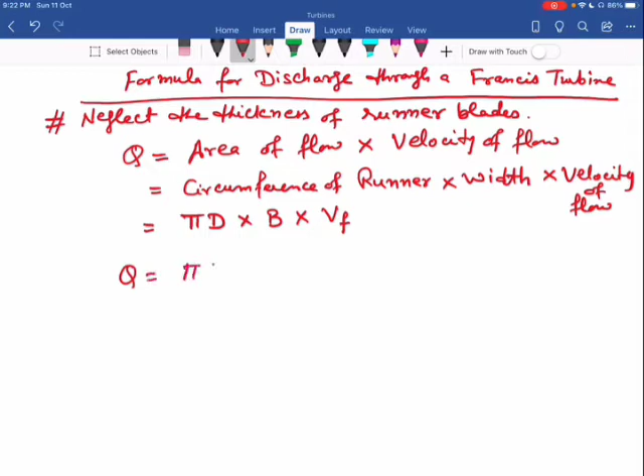Now the circumference I can write as pi d. Width of the runner I can write as b, and the velocity of flow I can write as vf. So discharge formula I can write as pi db into vf, where d is the diameter of the runner, b is width of the runner, and vf is the velocity of flow, or flow component of velocity. So that gives you the formula for discharge.

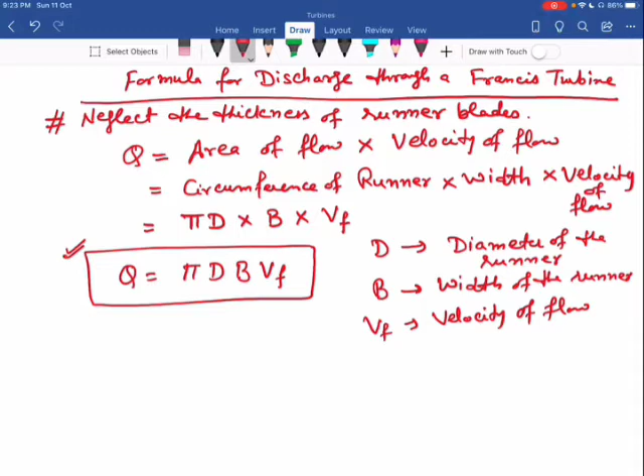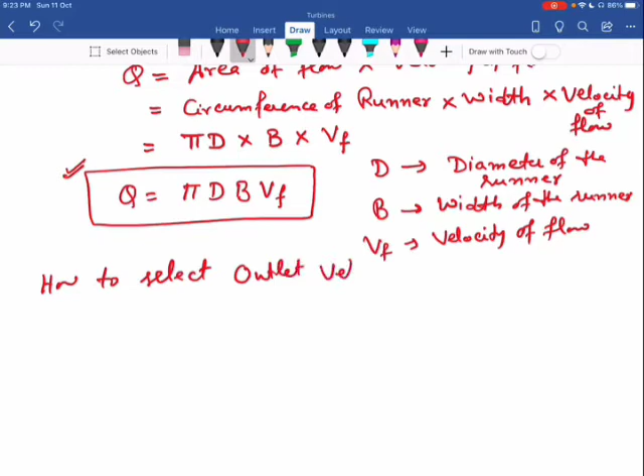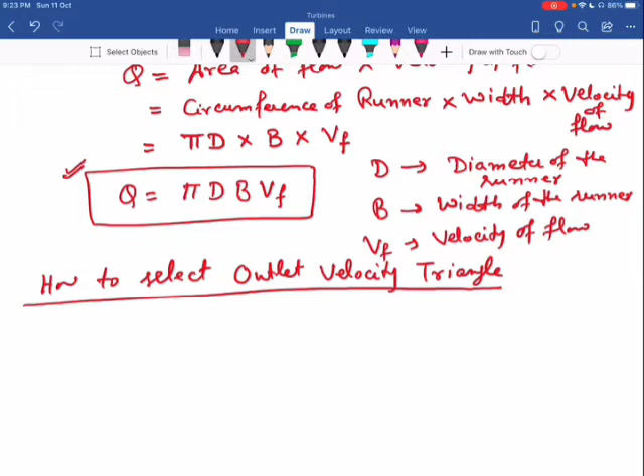Now next is how we select the velocity triangle. So for this we see outlet velocity triangle first. So next I see how to select outlet velocity triangle. As we have seen earlier, we have three different shapes for outlet velocity triangles depending upon angle alpha O.

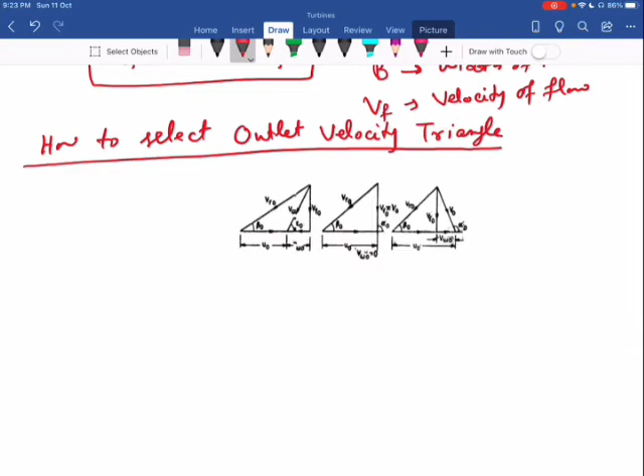So if I see this diagram, you can see three different shapes of velocity triangle. Here in the first, angle alpha O is less than 90 degree. Here alpha O is equal to 90 degree, and in the third, alpha O is greater than 90 degree. So at outlet we have three different shapes of velocity triangle.

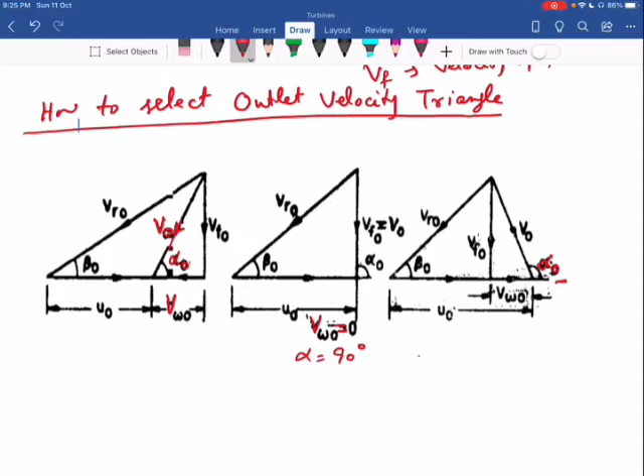Now this velocity is VO, and this component is VWO. Here the component VWO is equal to 0. Now the kinetic energy of outgoing water is given by VO square divided by 2. This is the kinetic energy per unit mass of water that is leaving the turbine.

So this is with respect to absolute velocity at the outlet, that is VO. So I can write the kinetic energy of leaving water as VO square divided by 2, and this is the kinetic energy per unit mass. As we know, this leaving energy is just wastage of energy going out from the turbine, so our purpose is to minimize this waste energy or leaving energy. So we have to minimize it.

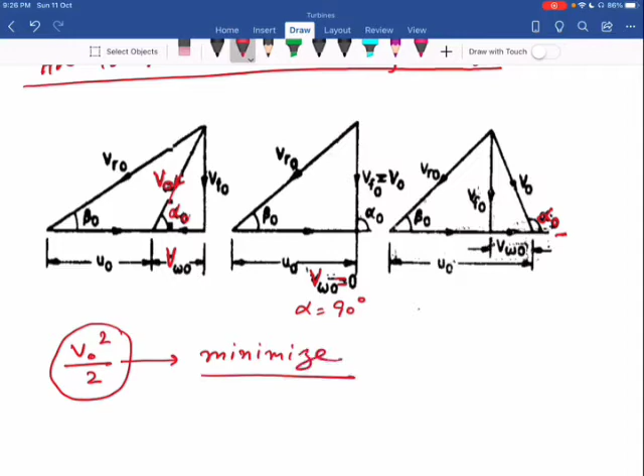So to minimize this energy, you can see from this formula that we have to reduce the value of VO. Now out of these three triangles - this is the first, this is the second, and this is the third velocity triangle at the outlet. Now you can see out of these three, for which triangle VO is minimum.

So now you can see in the second triangle, when angle alpha O is equal to 90 degree, VO is minimum as compared to VO in triangle 1 and VO in triangle 3. So you can say it is desired to keep this value to minimum. So from the outlet velocity triangle, it can be observed that the velocity VO will be minimum when angle alpha O is equal to 90 degree.

So in that case, VO coincides with VFO. You can see here VO coincides with VFO. Now further in this velocity triangle, you can see VWO, the whirl component of velocity, is 0. So thus in practice, all the reaction turbines are usually designed for this radial flow, meaning the angle alpha O is equal to 90 degree. So for the outlet, we have this velocity triangle.

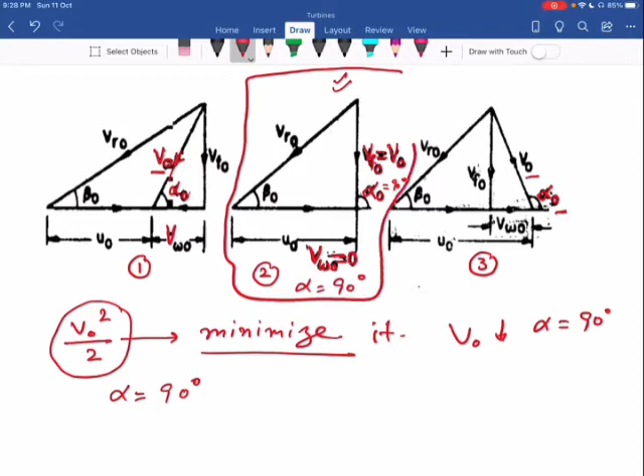So to minimize the value of VO, I have to select the second velocity triangle when angle alpha O is equal to 90 degree. Now further in the second triangle, we can further reduce the value of VO if we reduce the value of beta O. So this angle is also kept small, that is in the range of 15 degrees.

So keeping these two considerations in mind - the first condition alpha O equal to 90 degree, and then beta O minimum, approximately equal to 15 degrees - we have the second velocity triangle at the outlet of the Francis turbine. Now further in this, VWO is equal to 0. So this we also call as the radial discharge of a turbine.

Okay, so that means for radial discharge, we can keep alpha angle equal to 90 degrees, or you can say VWO equal to 0.

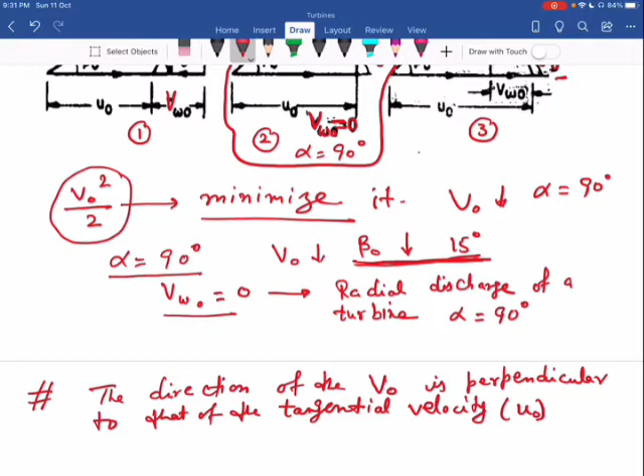Now this also implies that the direction of the absolute velocity of water at the outlet, that is VO, is perpendicular to the tangential velocity, that is u. So tangential velocity at outlet I can write as uo. VO is perpendicular to u or uo.

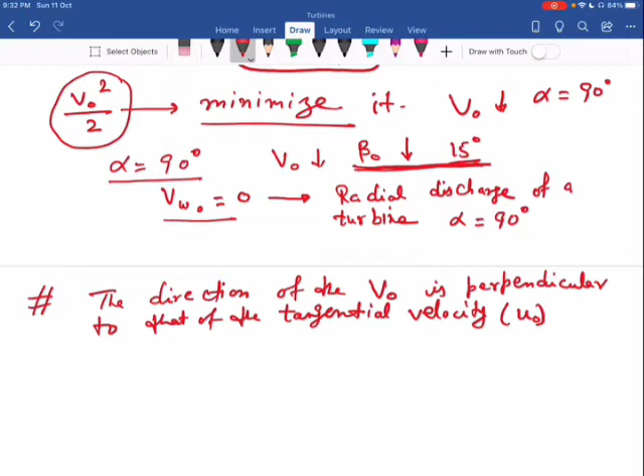Okay, then you see, this is the outlet velocity triangle. Now next we see the complete velocity triangles, that is at the inlet as well as at the outlet. At the outlet we always have the triangle with angle alpha O equal to 90 degrees, but at the inlet we have different shapes of velocity triangle that depend on the specific speed. So depending upon the range of specific speed, we have different shapes of velocity triangle at the inlet. Now we see the complete velocity triangle.

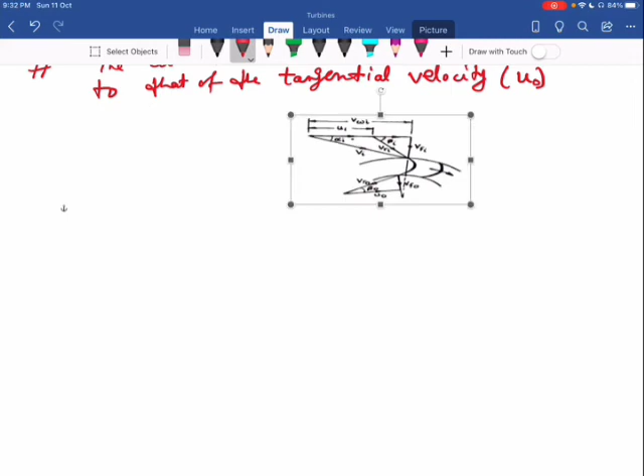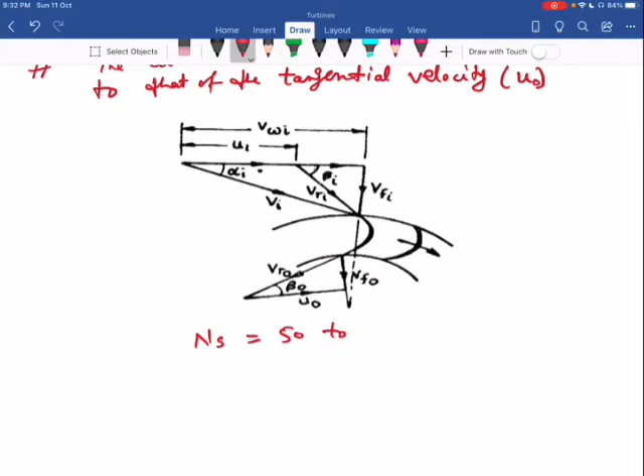Now the first one, you can see here. This is the velocity triangle for the range of specific speed ns equal to 50 to 100, that is for slow runner. Okay, so here we have VRI, this velocity is UI, and then we have VWI, this one, and this is VFI. We have two angles, angle 1 alpha I, and this angle is beta I. So depending upon the angle beta I, we have different shapes of velocity triangle at the inlet.

So here in this diagram, beta I is less than 90 degrees, and at the outlet we have the velocity triangle with angle alpha O equal to 90 degrees. So you can see here, the direction of VO is normal, or perpendicular, to UO and always directed toward the center of the runner. So that is the meaning of radial discharge, alpha O equal to 90 degrees at the outlet, you can say.

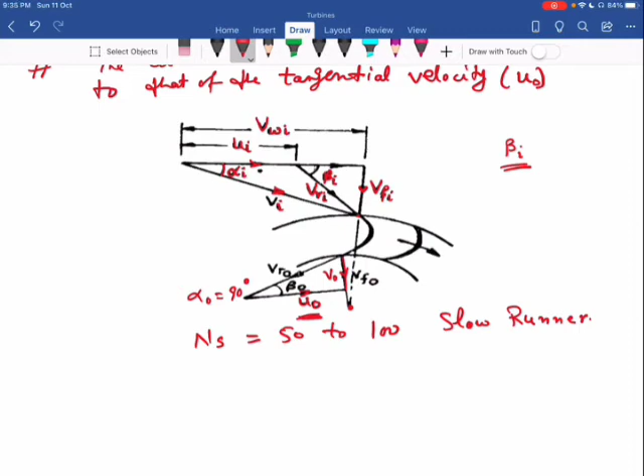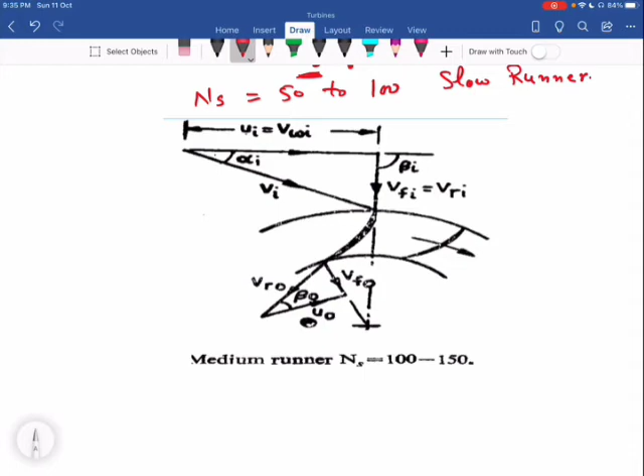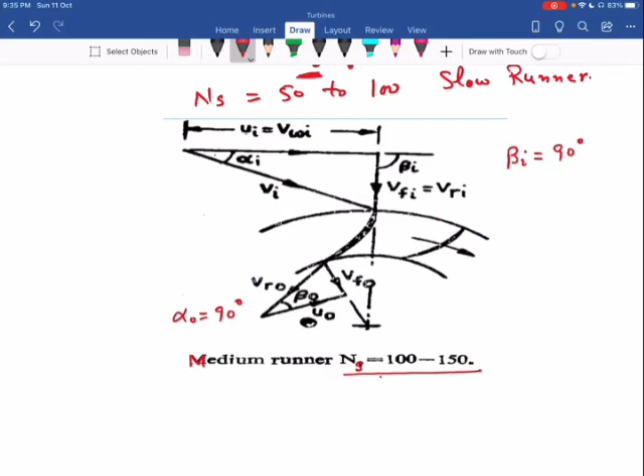Now the second velocity triangle, for medium speed runner, for this the range is 100 to 150 for specific speed. So NS is 100 to 150 and this is the medium speed runner. Here the angle beta I equal to 90 degrees, and also the angle alpha O equal to 90 degrees at the outlet. So this is the second shape of velocity triangle.

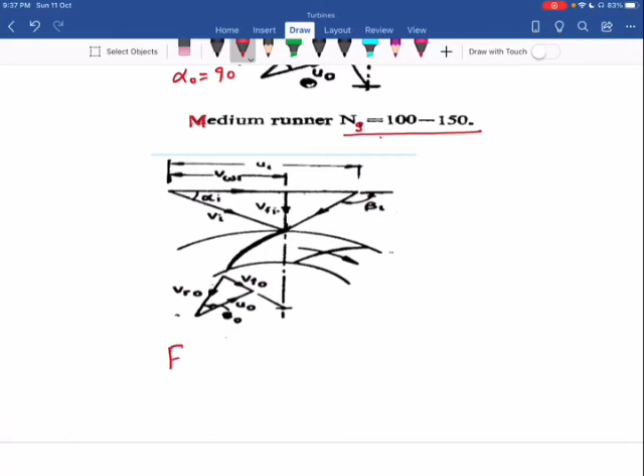Then the third one, that is for fast runner. The range of specific speed is 150 to 250. Here you can see angle beta I is greater than 90 degrees at inlet, and at outlet angle alpha O equal to 90 degrees, and further VO, that is also equal to VFO, is directed towards the center.

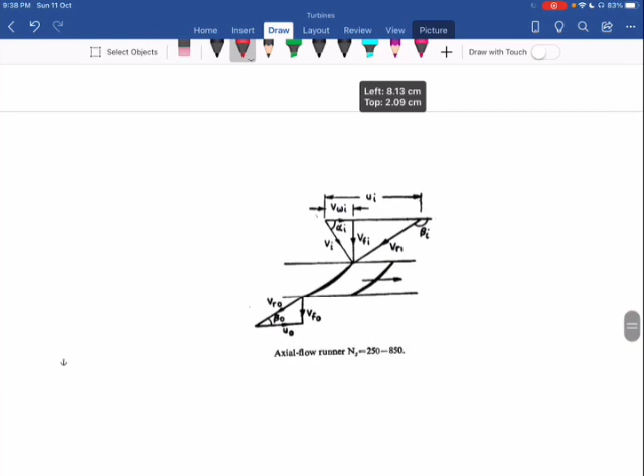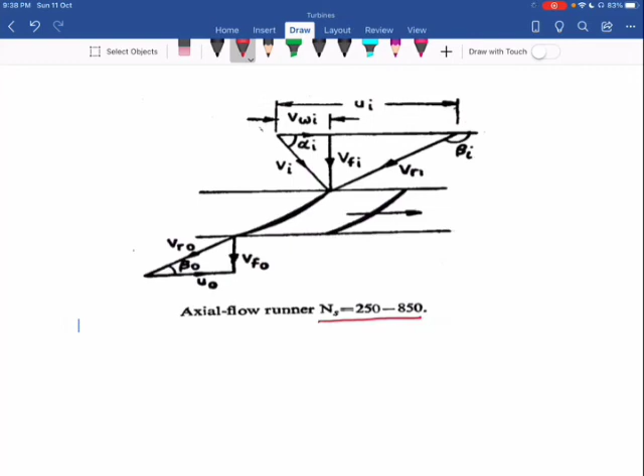Fourth one, that is for higher value of specific speed, normally for axial turbine, not for this case, but you can see that velocity triangle also. This is for specific speed range 250 to 850, and this is for axial flow runners, for higher value of beta I. Again, angle alpha O equal to 90 degrees at the outlet. So this shape of velocity triangle is usually what we have for axial flow runner.

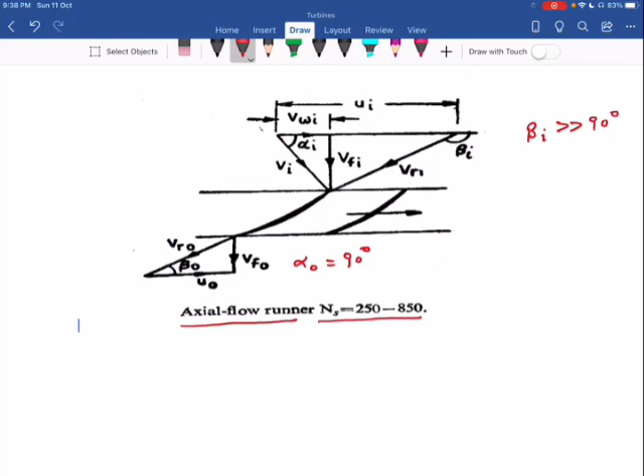However, these three shapes, the third one, the second one, and the first one, where angle beta I is less than 90 degrees, these three are for Francis turbine.

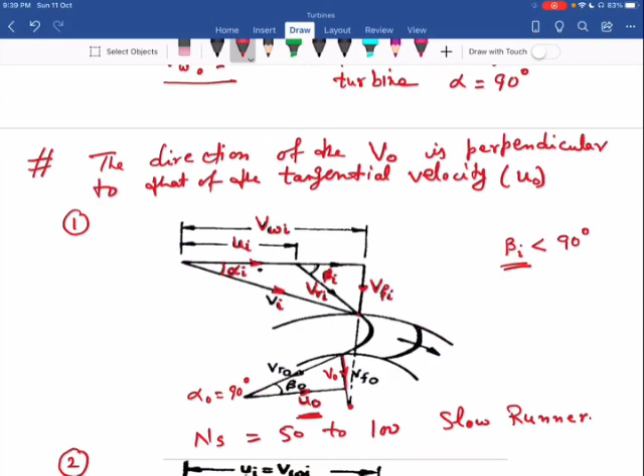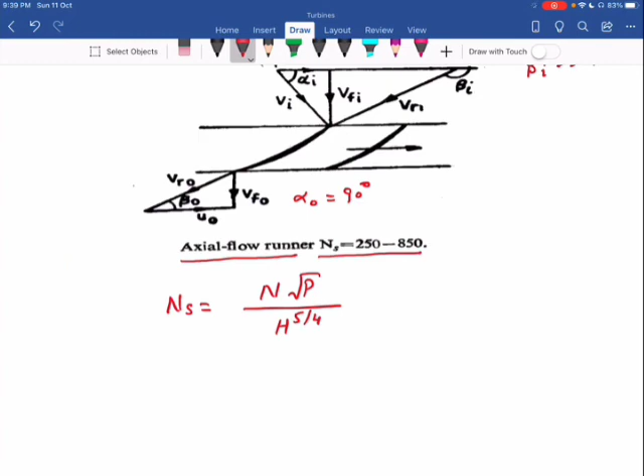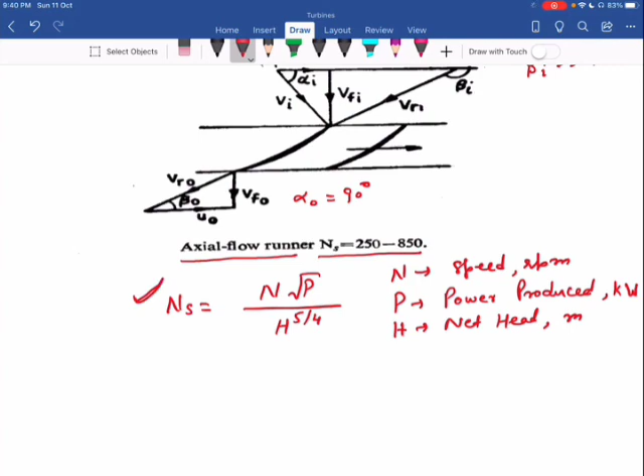Now the formula for specific speed, we have already written that. So you can note down as NS equal to N root of P, divided by H raised to power 5 by 4. N is the speed of the runner, in RPM. P is the power produced, in kilowatts. And H is the net head, in meters. So you can see how the shape of velocity triangle for Francis turbine depends on specific speed.